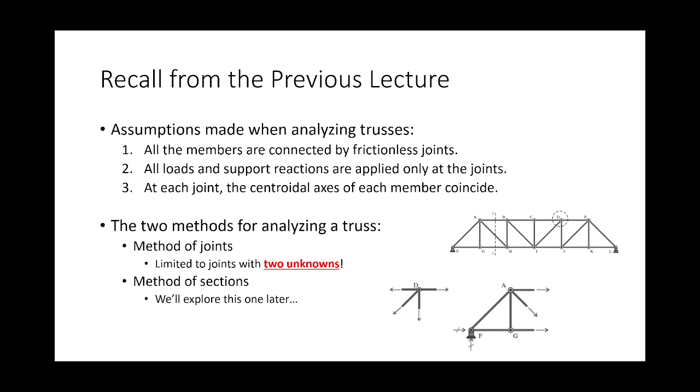So what I'm talking about are problems like this. Now, if you took me for statics, I actually just took these lecture notes right out of my statics lecture notes because we did this in statics. In fact, I'm teaching statics right now, and we talked about this on Wednesday. So this should be somewhat familiar if you had me for statics.

But if not, this is a problem that I know that you have dealt with at some point in your education. If you hadn't dealt with it in college, maybe Math 127 or Math 132, you probably dealt with it in high school algebra or something like that. You have 2 equations and 2 unknowns, and I'm keeping it simple. Really, it could be 3 equations, 3 unknowns. It could be 15 equations, 15 unknowns, what have you. And the idea is to find the singular value of x and y that satisfies both equations.

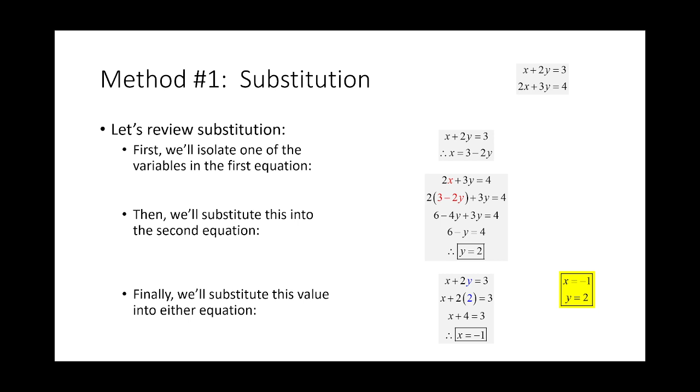That is one way of doing it, right? Okay, that's method number 1, substitution. Y'all remember doing this? Good, good. I gotta say, just about everybody in here should have done this at some point.

And when I say I multiplied the equation, I multiplied the left and the right side all by the same number, right? The idea is like if a equals 6, well then 3a equals 18. You multiply both sides by 3, right? So you multiply both sides by the same number. Now, why did I just randomly do -2, just out of clear blue sky?

I will have to call AJ back. Sorry, AJ. I'm in class.

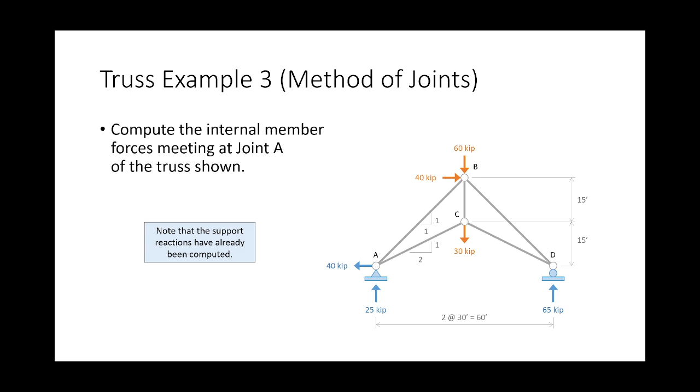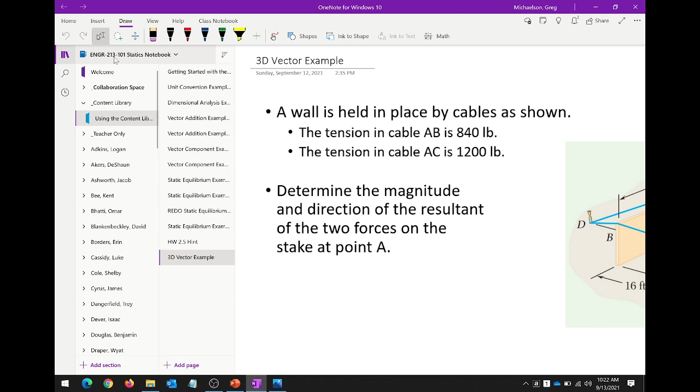I have my statics notebook open. You're like, no, we're done with that. We're not doing that. That's just mean. Would you like me to do this in IJ vector notation? You're like, you really want to see your mistake counter go up, Dr. Mike? That was a joke.

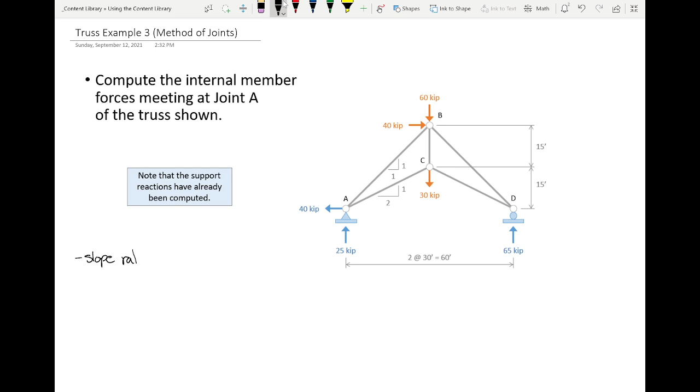Okay. All right, and again, I'm all about building on our topics. So like you see, I also gave you the support reactions. So I think at this point, you should know how to compute those. Okay. Now, before we start looking at the joint, I kind of want to, off to the side, look at our slope ratios. So I want to start off by looking at member AB. Because in order to do this, we're actually going to need to look at the entirety of the triangle. So what do I mean by that?

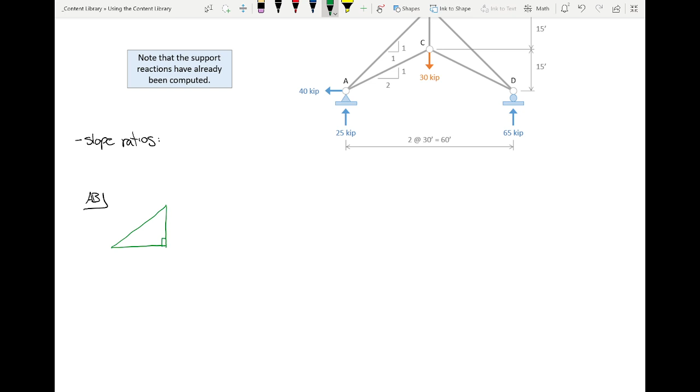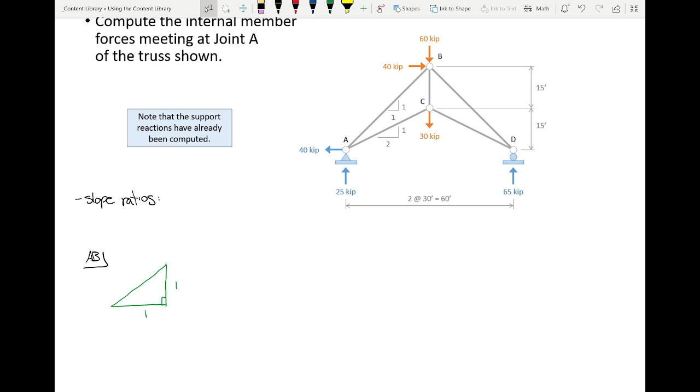Now, if you look here, this is member AB. We're talking about this upper diagonal, and I have that this is at a 1-to-1 slope ratio. Now, before we move on, let me ask you this. If I didn't tell you that this was at a 1-to-1 slope ratio, could you identify that? From A to B, we go over 30, up 30. Okay? Now, if this is at a 1-to-1 slope ratio, what is the length of the hypotenuse? 1, 1. There we go, square root of 2. Is everybody okay with that?

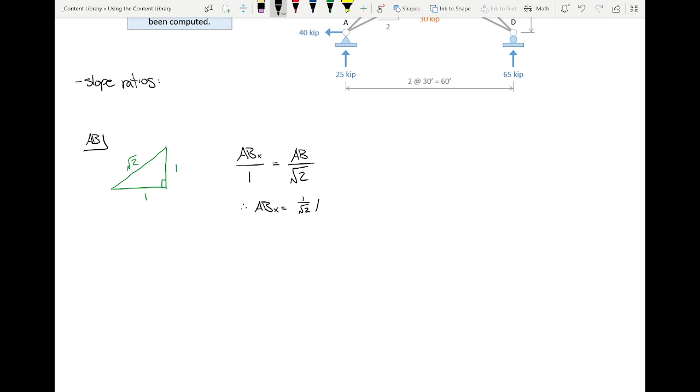So let me ask you a question. Would you agree with the following statement? Would you agree with that? ABX is to 1 as AB is to the square root of 2? Okay. So you'd agree with that? Just keep that in mind. Likewise over here. And I'm being pretty formal with this because on our next diagonal, you're going to get different answers. So ABY is also going to be is to 1 as AB is to the square root of 2.

And I'm sure that there's some math professor out there that's getting all upset at me and saying, you have a radical in the denominator. You got to do square root of 2 over 2. No, I don't. Arrest me. If I put 1 over square root of 2 in my calculator, it gives me the right answer. I'm an engineer. I'm not a mathematician. Everybody okay with this? All right. So, go away.

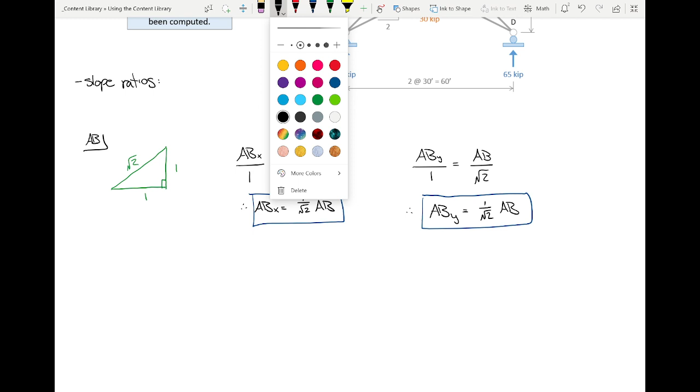Okay, so now let's look at member AC. So member AC was at a 1-to-2 slope ratio. So 1 to 2, what's the hypotenuse? Well, square root of 5, right? 1 squared plus 2 squared is 5, so this is the square root of 5. You might be thinking of a 30, 60, 90 where it's like 2, 1, square root of 3. So now ACX is to 2 as AC is to the square root of 5. So therefore, ACX is 2 over the square root of 5 AC.

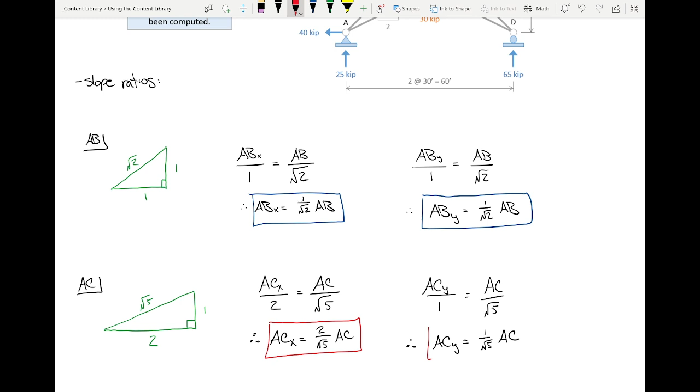Is that okay? Now, just so you're clear, we didn't bother doing this before because we never had a situation with 2 diagonals. I'm doing this now because when I start doing a bunch of substitution, I'm like, whoa, where did that come from? It came from this. So there is a method to the madness, trust me. And I know that a lot of this seems obvious, but taking it slow and being methodical will ensure that we understand it as we move forward. So ACY is to 1 as AC is to square root of 5. Okay, let me scroll down just a little bit.

Now, as you all are writing this down, I'm going to stop for a second and just make sure that this makes sense, that I'm not going too fast. My philosophy is that whether it's scholarships, loans, your parents, somebody's putting cash money on the table for you to be in this room right now. So if you don't understand something, you ask. Everybody good? Okay.

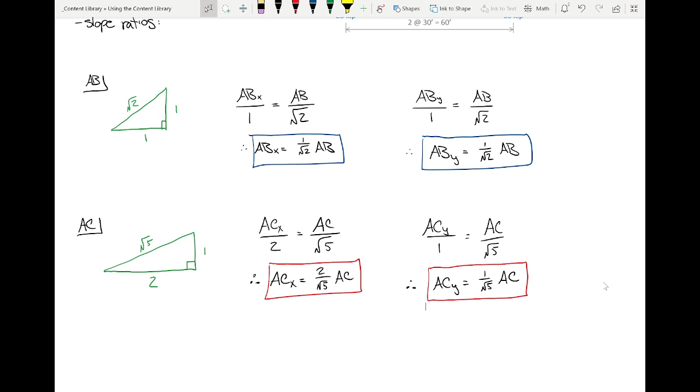So this is sort of the background, the context. Now we're going to do a method of joints analysis of joint A. I'm going to scroll down so that I got some room to write. Okay. Now, let me give you one of Dr. Mike's tips and tricks for doing this. Whenever you're dealing with two diagonals, and especially on a truss like this where you got all sorts of loads in all sorts of different directions, assume both members are in tension. Trust me on this. Just assume they're both in tension. I promise it will make your life easier in the end, and you'll see why.

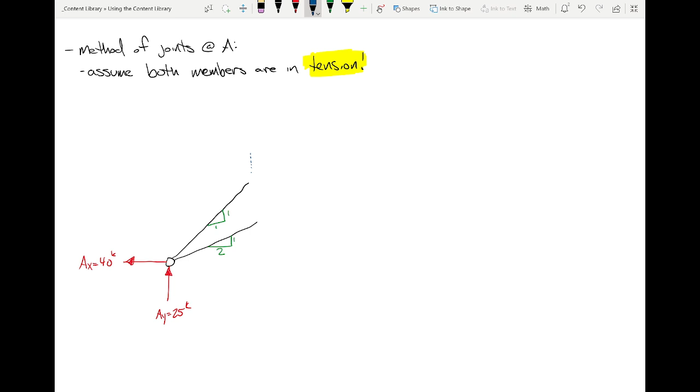Okay? So let's draw this joint. So here's the joint. And then we have a member going up like this, and a member going like this. This is 1 to 1. This is 1 to 2. There are reactions on the joint. This one is AY, which was given as 25 kips. There's a horizontal reaction, 40 kips to the left. Now I've got two diagonals. What I'm going to do is assume they're both in tension. So this is ABY, ABX, ACY, ACX. So far, so good?

Now, unlike the previous method of joints problems, where we'd be able to look at this and go, okay, I've got two vertical unknowns, one horizontal, so we'll do sum of forces in the x direction first, use the slope ratio to get that, and then do sum of forces in the vertical. We can't do that here, right? There's two unknowns vertically, two unknowns horizontally. So it doesn't matter what order we do it in. Let's do x direction. So let's sum forces in the x direction.

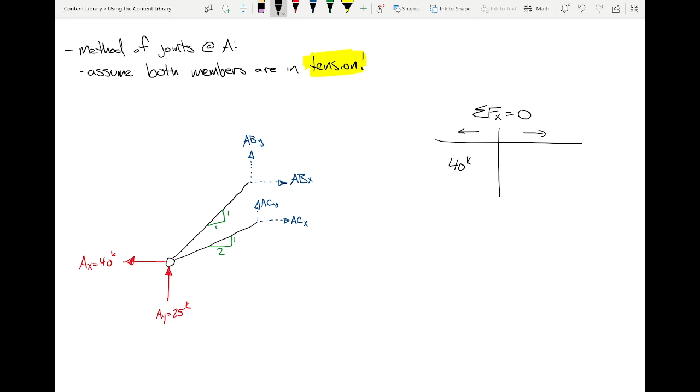So what do I have going to the left? 40 kips. What do I have going to the right? There you go, ABX. Okay? So, now, before I sum this up, help me out. What does ABX equal? Doesn't it equal, well, what about this? Isn't that what we did up there? We said ABX is 1 over the square root of 2 AB.

Now, what if I had just told you that without doing that slope ratio thing? Some of you are like, where did you come up with that? That's what that whole slope ratio discussion was about, so that when I just put this up here, you're like, oh, now I see what he was doing. I'm using the slope ratios, using the trig to redefine that. Help me out. What's this one? There we go. That is the worst root symbol I've ever drawn. So would you agree with that equation now? Not too bad, right? I'm going to call this equation 1.

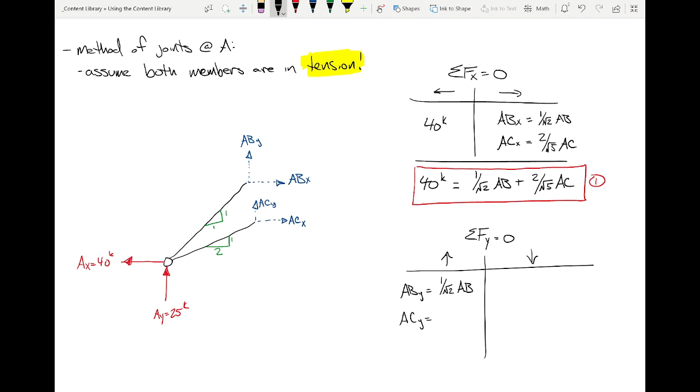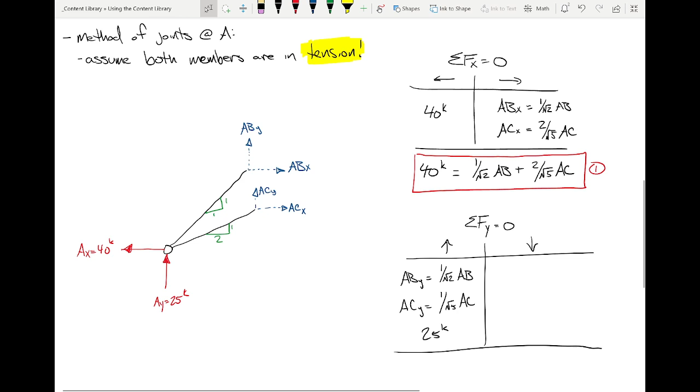ABY, ACY, 25 kips. So I'm going to say ABY, but ABY is 1 over the square root of 2 AB. ACY, but that's 1 over the square root of 5 AC. So I'm going to get the following: 25 kips plus 1 over the square root of 2 AB plus 1 over the square root of 5 AC is 0. And this is going to be equation 2. So now I've got 2 equations, 2 unknowns, right?

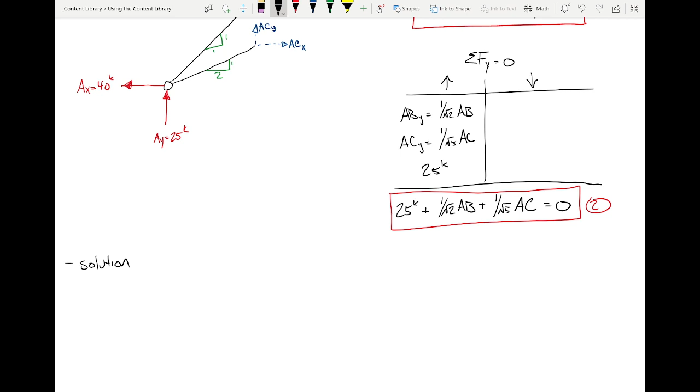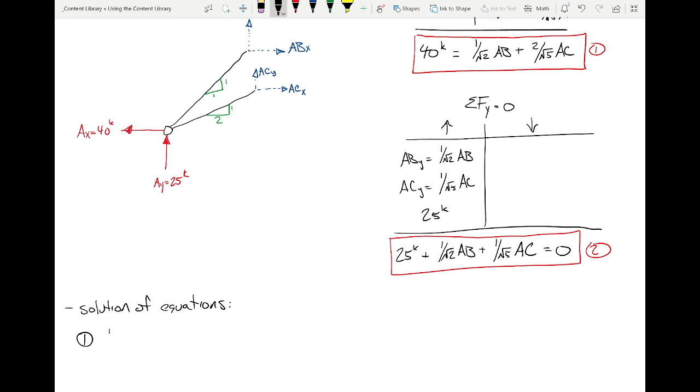I need to plug this into the Casio. How am I going to do that? Okay, so what it's going to involve is some rewriting of the equations a bit. So let me do this. Hold on. I want to do this in such a way that you can see both equations on the screen, so I'm not just doing some magic here. Okay, let me rewrite both equations, and then I'll show you what I did and why I did it. Equation number 1, I'm going to rewrite like this. And then equation number 2, I'm going to rewrite like this. Okay?

The reason why I'm doing this is, first off, you got to have your variables on the left, you got to have your constants on the right. So I wanted to rewrite the expression to where the numbers were over here. So the 40's over here and the 25's over here. For the first equation, all I had to do is, if A equals B, then B equals A. So just this equals 40. For this one, I subtracted the 25 over. You see what I did there? So that's why this is 40 and that's negative 25.

And then the other thing to keep in mind is that the variables have to be in the same order. So AB, AC, AB, AC. A good way is to do it alphabetically. So I'm just keeping it in alphabetical order. And so the reason ultimately for this is if I put this in the Casio, I can enter that matrix in the Casio. And what the Casio will spit out are two answers, X and Y.

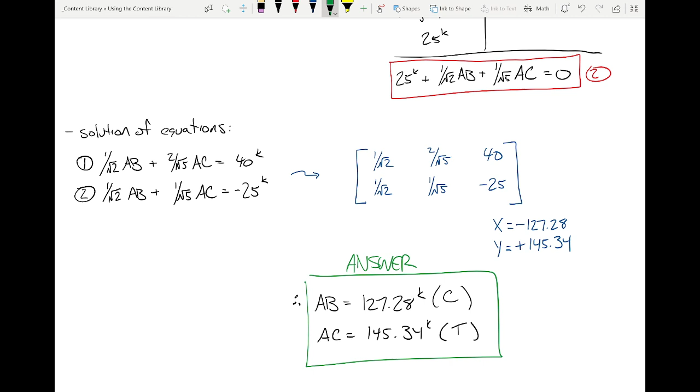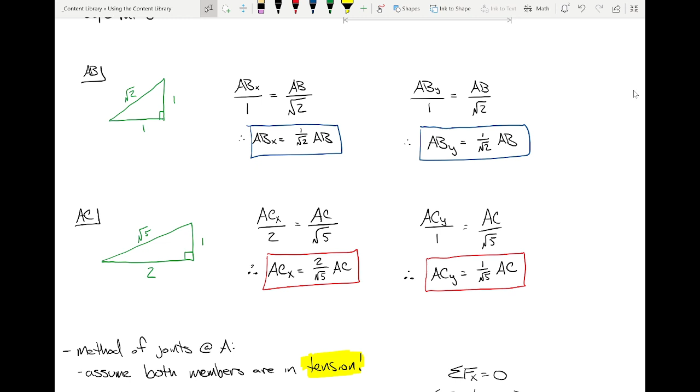And so keep in mind, this is AB and AC. If you want the X and Y components, well, plug them into that. That's what we solved these for, right? So we've got AB. If I wanted ABX or ABY, there you go. Is that too bad? It's not too bad, is it?

Any questions? Do we need to split it into components ever? If you wanted to solve for the rest of the truss, probably yes. Other than that, no, not for the purposes of this problem. And ultimately, as a designer, you don't really care about the components. You just care about what's in the member. But I would say the only reason for getting it back into your X and Y components is if you need it for the rest of the truss. Any questions? All right.

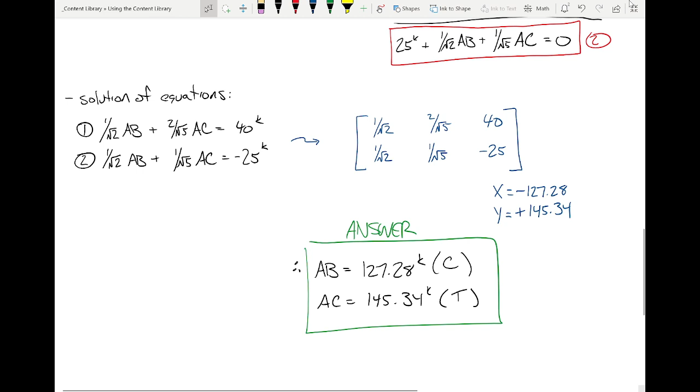I want to show you something for the rest of class, and then we're going to call it. This is a skill which is necessary, in my opinion, to expedite truss analysis, and that's identifying zero force members. I'm going to go through this kind of quickly. One, I'm not giving you a homework assignment on this part. This is just something I think you need to be aware of. Two, while I think it's necessary to make your truss analysis go fast, it's not technically necessary. You can just do a truss analysis and let the forces come out the way they are. This is just more for gut check.

Now, we've talked a couple times in here about why zero force members would be present. Instead of carrying loads, zero force members may serve as braces. They also, and this is a big one, may be zero force members if the loads do not move, okay? And so there's two areas where that might matter. Deflections, where we do two separate truss analyses for a given problem, so you're doing different loads. But if you have a structure where the loads move, sometimes there's zero force members when the loads are in one position, and then they're carrying load when the load's in another position. So bridges, right? Some of the members on bridges might be zero force members when the truck's here, but not when the truck's here.

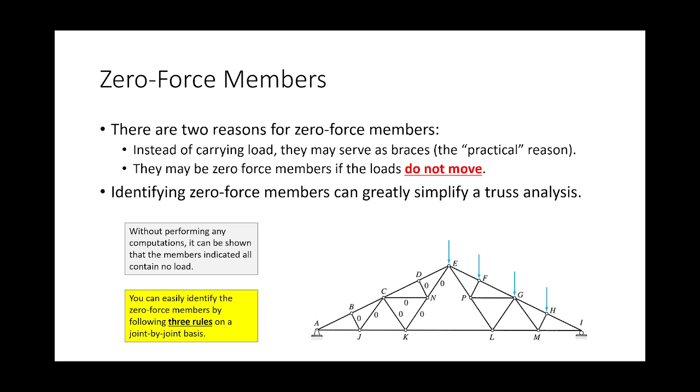Okay. Rule 1 is the no load applied at the joint rule. So, if you have a joint that has 2 members with unknown forces, and the members can't be collinear, they can't be like member A and member B all on the same line. They've got to be something like this. If you have a joint like that that's got 2 unknowns and there's no load at the joint, no external loads, no reactions, then they are both zero force members. Now that's not some magic. That's not me being Nostradamus.

Just sum forces, take this joint here, sum forces in the y direction. There's no force going up or down. So the vertical component of this has to be 0. If the vertical component is 0, then the horizontal component is 0. And if this is a zero force member, sum forces in the x direction, that's going to be a zero force member. But it's not magic, it's just using the equations of statics to make conclusions, okay? Now this also holds true if there's something like this. Let's say I have a joint that's got 4 diagonals, but 2 of them have already been figured out to be zero force members, then these are zero force members too. Okay, so that's rule 1.